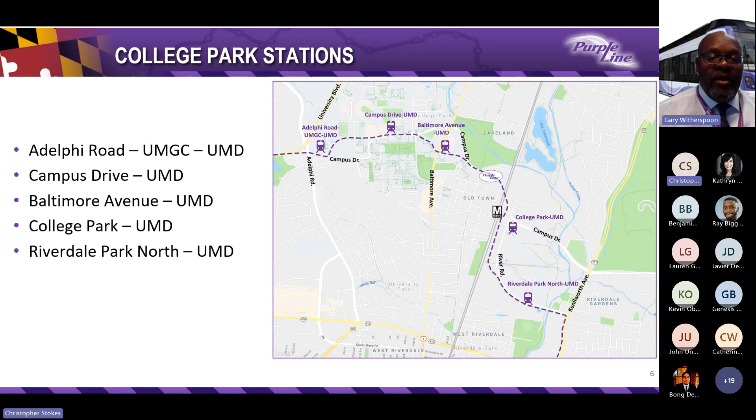We're excited to share that we've created new renderings we're sharing for the first time during this meeting. We've completed a series of renderings that will give the public a true depiction of how the station areas will look. The project will enhance pedestrian safety around each station with ADA-compliant crosswalks and upgraded signals to include pedestrian countdowns to safely cross the roadway.

The first rendering features the Baltimore Avenue UMD station at Rossborough Lane and Route 1. This station features side platforms, meaning there is a separate platform for eastbound and westbound trains, with the trains on the outside lanes and vehicular traffic in the center lanes.

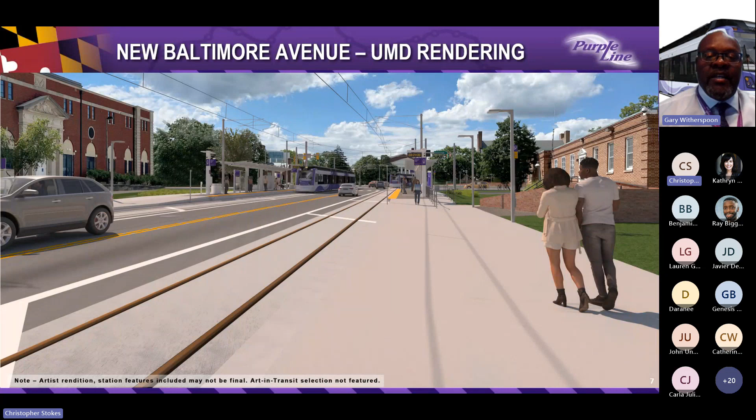This next rendering is of the Riverdale Park North UMD station. It illustrates what this station will look like. It's adjacent to River Road near Haig Drive. If you've recently been to this area, you'll know the station canopies pictured have been installed on the station platforms.

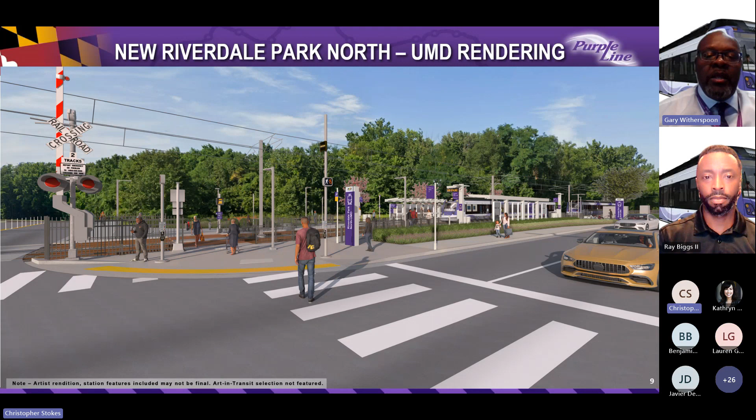Thank you so much, Gary. And good evening, everyone. We are excited to share with you an update of all the progress we have made over the last 6 months. Gary just showed some renderings of one of the stations that you will see in this progress update video that we will share with you right now.

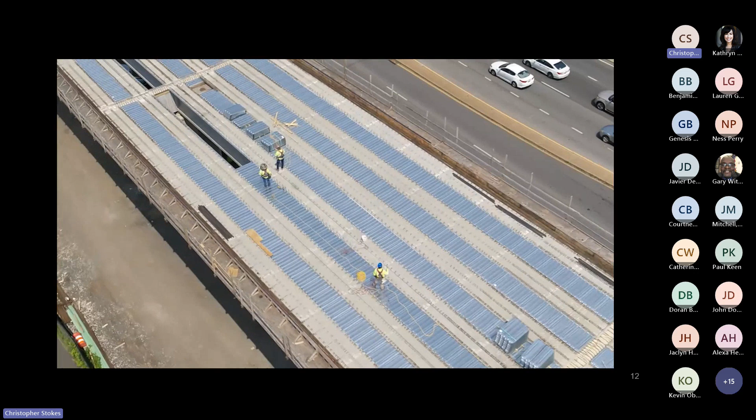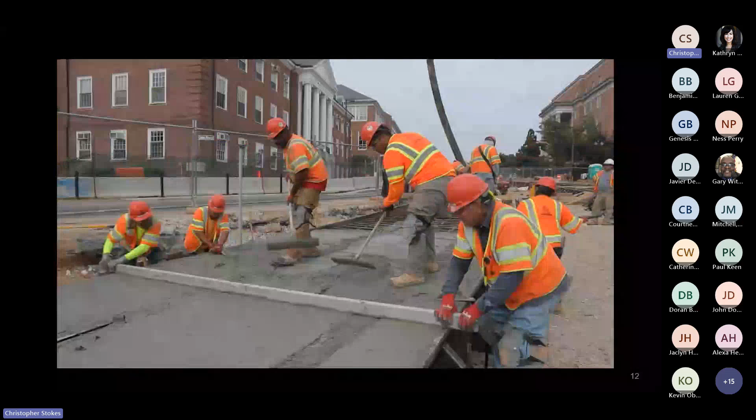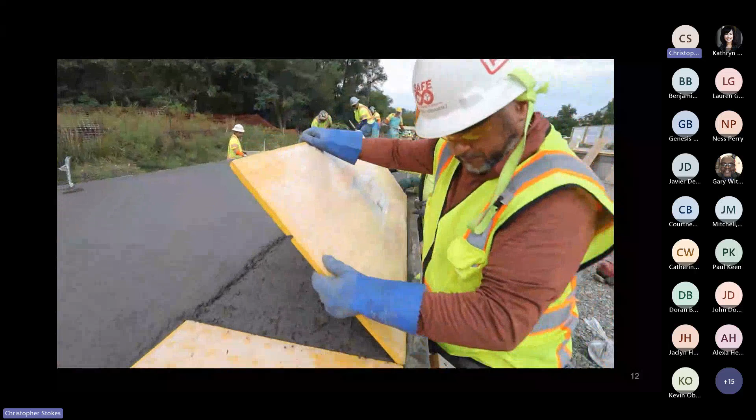I am sitting here at one of the many businesses that will benefit from the Purple Line, directly across the street from the new Riverdale Park North UMD station. This will be the first complete station. As we near the end of 2023, the nearly 1,000 workers building the Purple Line is making measurable progress along the alignment.

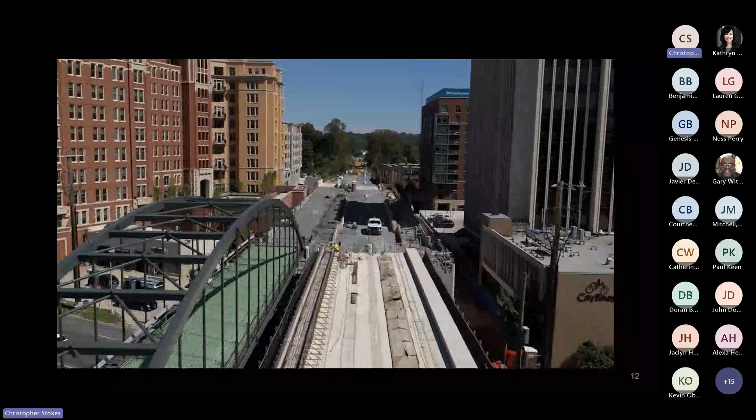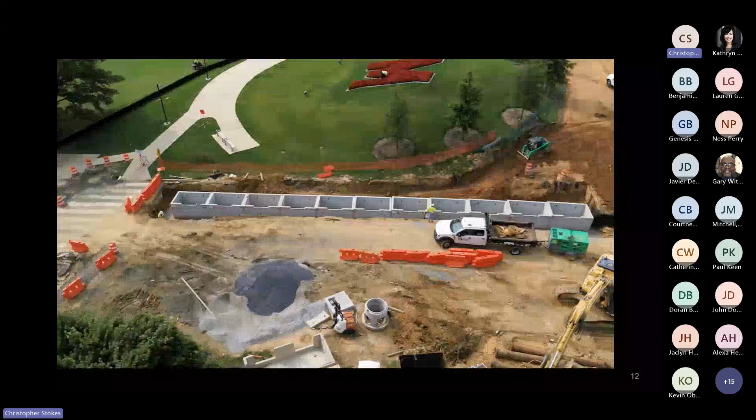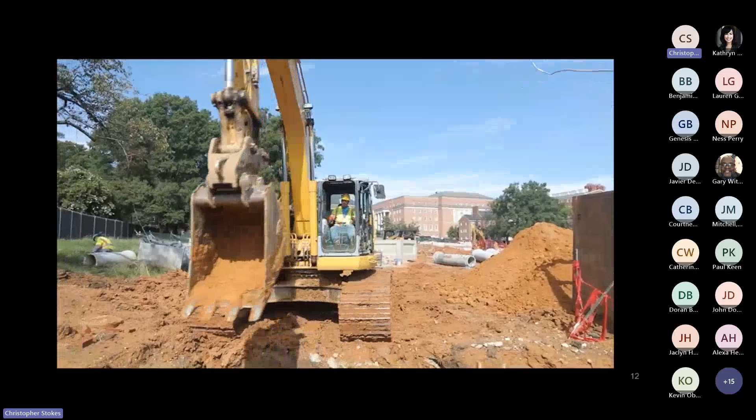Another significant improvement is the new stormwater management system. This includes miles of new pipes ranging from 12 inches to over 72 inches in diameter. More than 53% of this new pipework is now complete. Along with concrete pipes, our teams have installed over 20,000 square feet of underground sand filters, retention ponds, and planter boxes, all important parts of the new stormwater drainage system. These critical environmental upgrades may not be visible above ground, but must be completed before tracks are added.

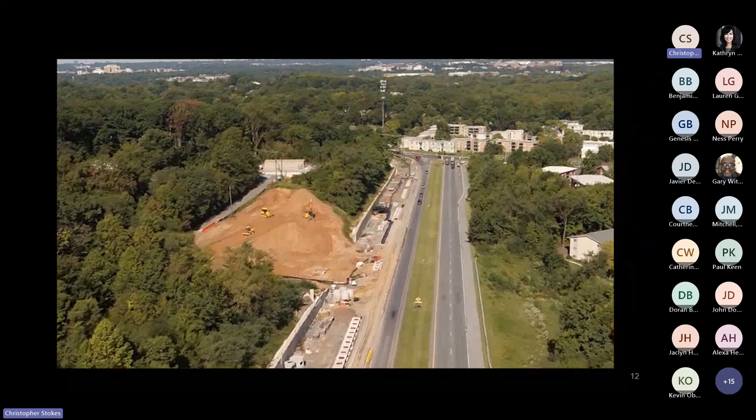In Bethesda, work connecting the elevator to Metro's Red Line has reached the bottom of the shaft, and teams have started excavating horizontally to create the cavern.

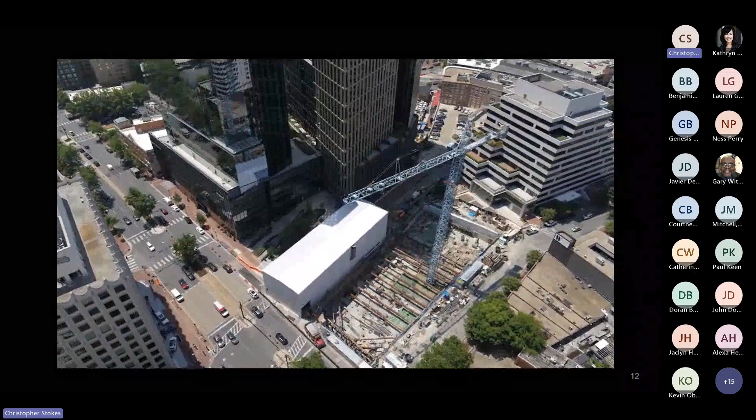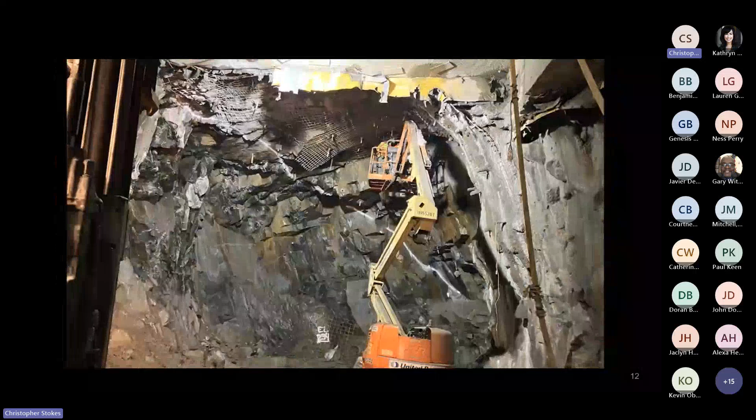The Elm Street pedestrian path across the alignment, as well as another half a dozen bridges and underpasses, will serve the new and improved Capital Crescent Trail.

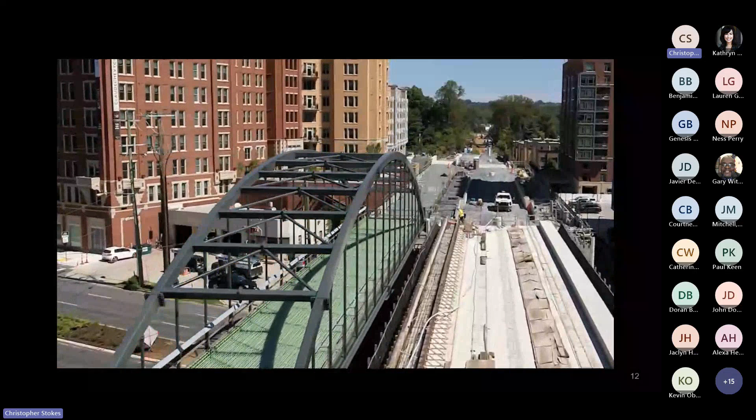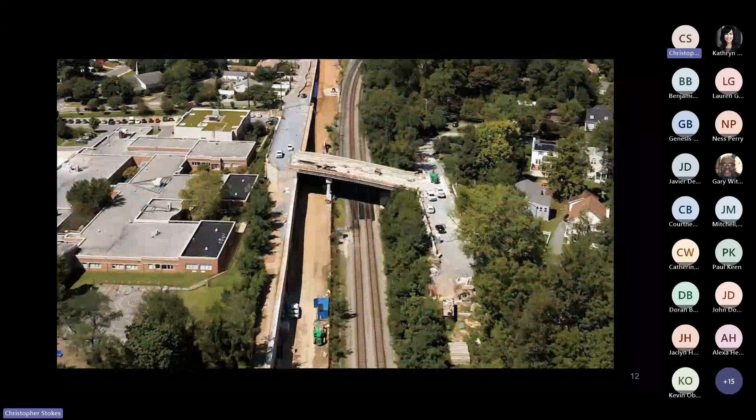Concrete placement of the historic Talbot Avenue Bridge occurred in early 2023, along with necessary road improvements, making it possible to open the road this year.

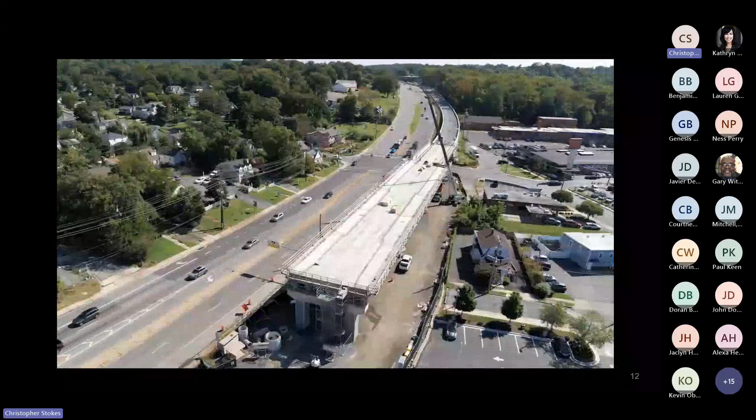Concrete for the elevated Silver Spring Station and the elevated Kenilworth Riverdale Station are complete, and crews are hard at work on the utilities and other advanced station elements.

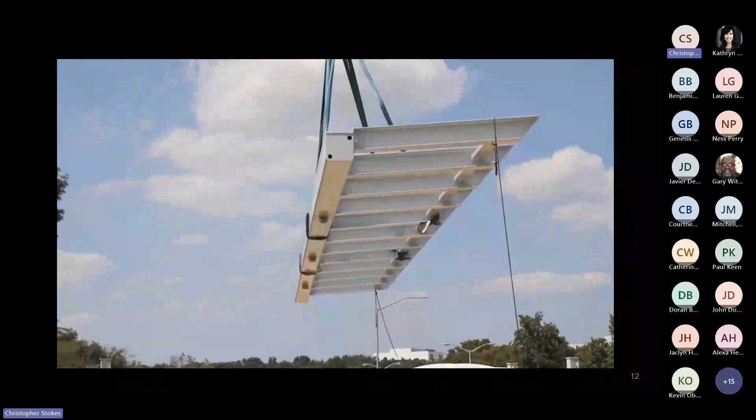And speaking of stations, more than half of Purple Line stations are currently under construction, with structural canopies installed at Riverdale Park North UMD and Glenridge. Canopies provide an exciting glimpse of how Purple Line stations will look.

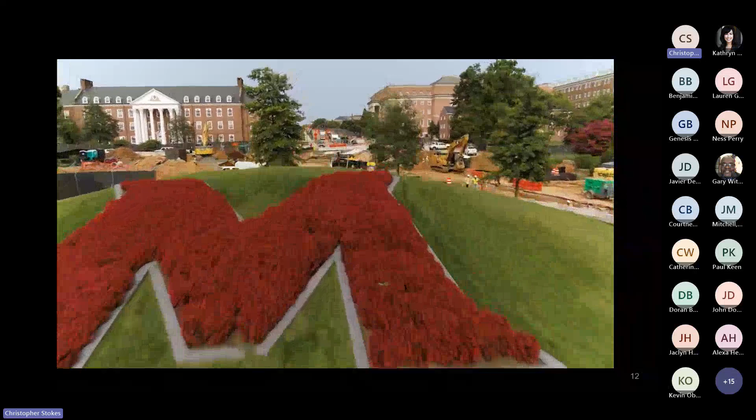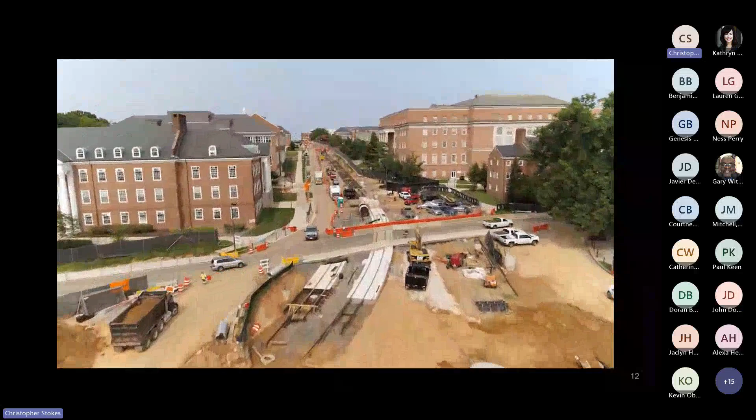During the summer break at the University of Maryland, crews accomplished a tremendous amount of work, completing drainage, roads, and tracks. Over 1,500 linear feet of track is now in place on campus as part of the 5 future stations servicing the University of Maryland.

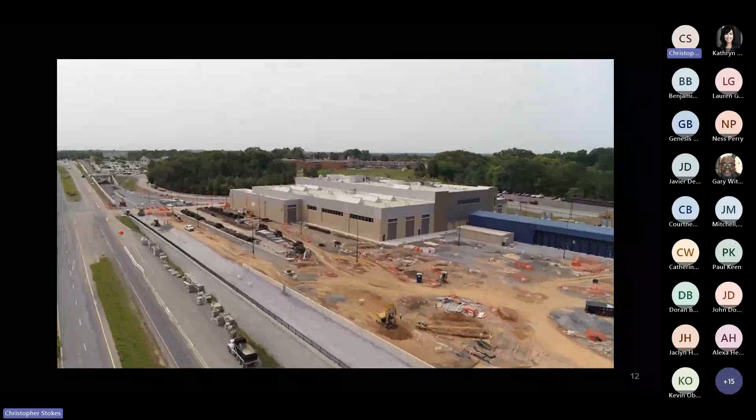Along Veterans Parkway, our Glenridge Operation and Maintenance Facility is fully operational, with yard utilities and specialty track installation underway. Purple Line light rail vehicles are scheduled for delivery here in early 2024.

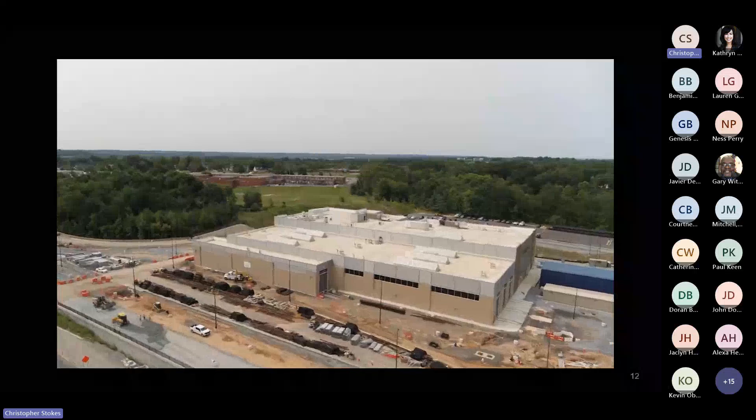All right, we have been busy over the last 6 months since we last spoke with you. And the project, as mentioned in the video, we are more than 58% complete.

A lot of that is due to working in collaboration with the University of Maryland over the summer to get that shut down. As you saw in the video, we are going right down the center of campus, down Campus Drive, and we have accomplished a lot there.

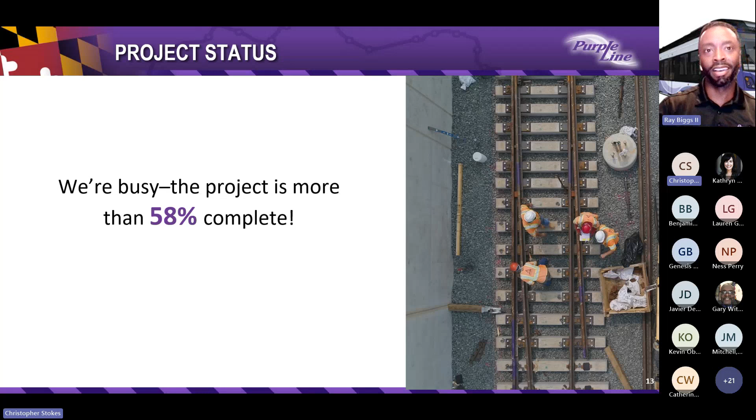We have over 60 active construction sites with over 1,100 workers. That contributes to us completing 98% of the utility relocations across the alignment, as we also highlighted in the video.

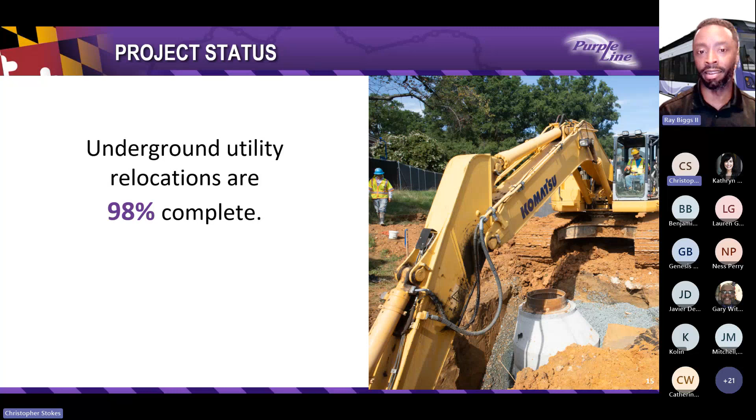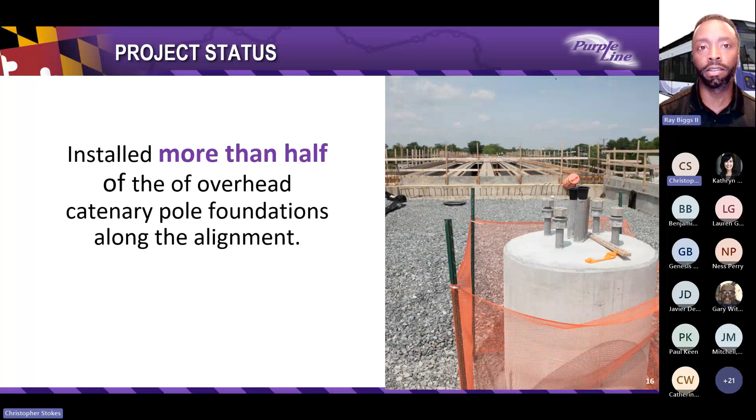In addition, we have installed more than half of the overhead catenary pole foundations along the alignment, and that is the foundation of helping to provide the power that will ultimately serve the Purple Line.

And from that power, we've installed 3 of the traction power substations, which provides the electricity over to the catenary lines to help power the Purple Line.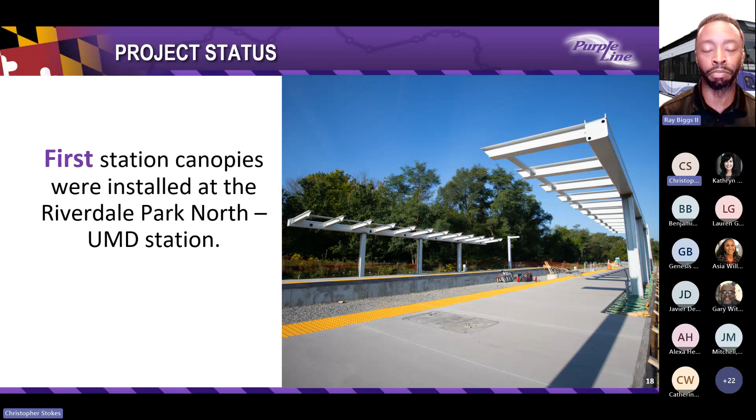And on the next slide, we talk about how many light rails we have completed. We have 26 of those, which are up in Elmira, ready for delivery, and we will start receiving delivery of those in early next year.

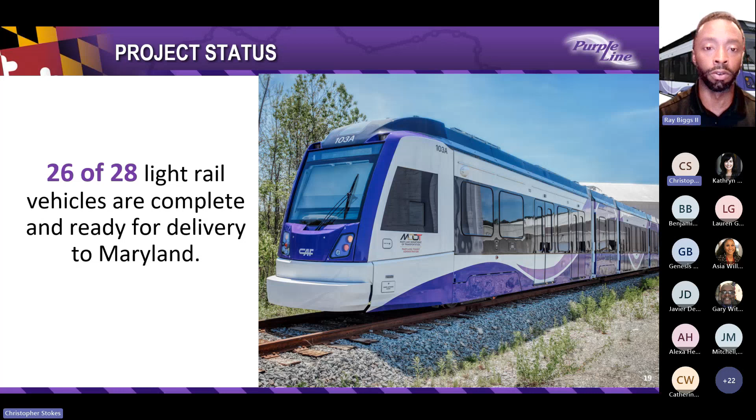And as mentioned, all of the stations are beginning construction, with 11 of them beginning construction of the 21 stations. And tonight we'll talk about all of the UMD stations and highlight what is happening across the alignment.

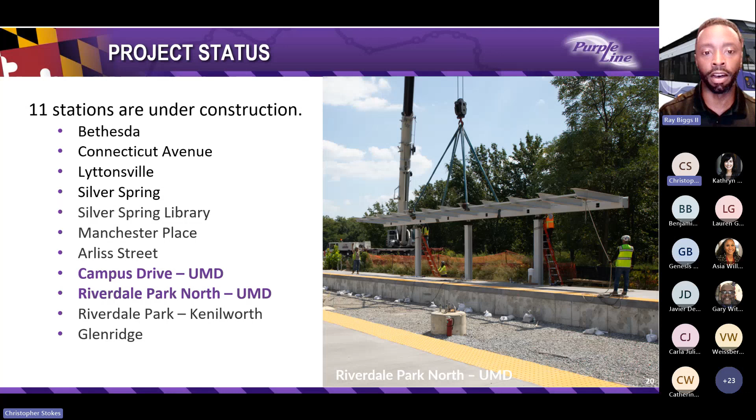With that, I will turn it over to Doran Basso, who will talk about the project timeline and give us an update of where we are with the schedule.

Thanks, Ray. So with all that progress now behind us, on the next slide, we'll look forward to where we're going. This summer, the project went before the Maryland Board of Public Works and gained approval to extend the contractual timeline for passenger service to spring 2027, as you can see there in the chart.

And this change reflects the ongoing utility relocation activities, completing construction in a dense urban environment, and some of the unique challenges that the Purple Line project has faced. So let's walk through the project timeline.

You'll see that in early 2024, light rail vehicles that Ray just showed us will arrive at our Glenridge Operation and Maintenance Facility in Prince George's County.

In the summer of 2025, we're scheduled to complete the test track, followed by system-wide testing to begin later that winter. And our teams are all working hard towards the start of passenger service, scheduled in spring 2027, as I mentioned. So for more details on what's right in front of us in this area, let's talk to Javier.

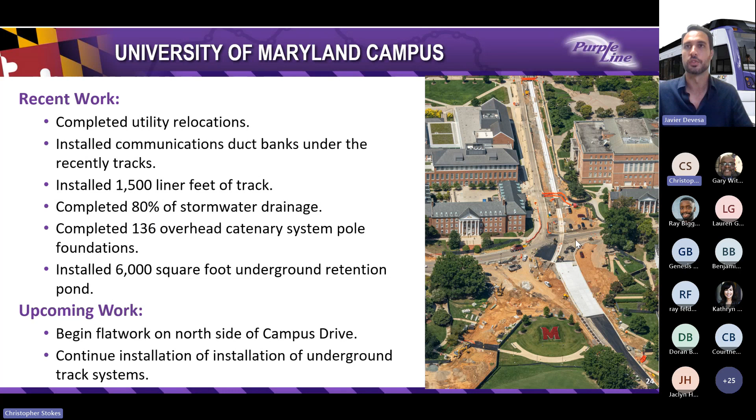What is the upcoming work for the University of Maryland? There's going to be flat work, trying to finish everything for phase 1 so we can fully transition to phase 2. We're going to continue moving west from Union Lane to complete everything for the tracks and the planter boxes and the next activities.

Let's go from west to east. The first section is the Presidential Drive and Campus Drive intersection. There we've been working with drainage mostly, which you can see in the corner next to the fence of the picture. All the storm drain was completed in Presidential Drive, as well as the OCS.

This area is one of the widest in terms of space, which allowed us to pull out all the resources for the OCS, basically a huge crane taking up all the space. So we could have pretty good production in that area, which allowed us to complete all the OCS in phase 1.

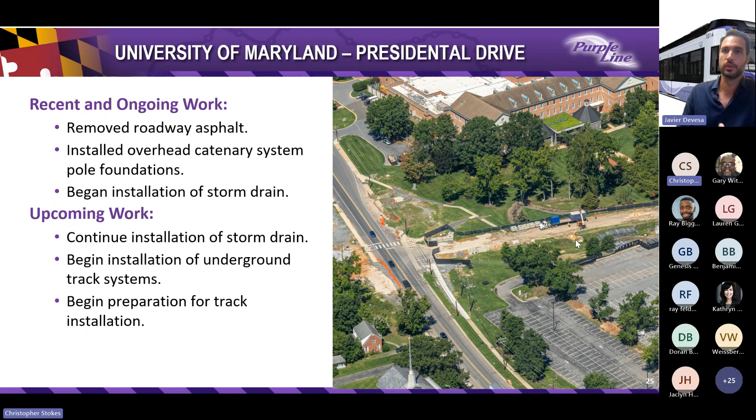The upcoming work within the next months includes installing the planter boxes, which are drainage systems all along Presidential Drive. Next, we're going to be installing the conduits and getting everything ready for the track works.

Moving next to the Cole area, that's what you can see in this picture. The main event of summer was the start and completion of the north platform of the future Campus Drive station. What you can see here is the north platform with, at this time, the backfill and the walls being built in this area. We completed the north platform last week.

Actually everything has been completed except for the canopy. The canopy is going to be built at the same time as the south platform, which will start in phase 2 after we complete phase 1. But everything was completed on this north platform of the Campus Drive station.

Next to this station, we had Union Lane, an intersection that was also completed this summer, both track 1 and track 2. There was very good collaboration again by UMD, which allowed us to close this intersection, detouring vehicles a little to the south. That made it possible to complete this whole intersection, otherwise it would have had to be done in 2 different phases. That was very good, big progress from this summer.

Upcoming work is pretty much the same, trying to get to the west, completing all the track works. We've already completed the planter boxes in this area in front of the Cole building. You cannot see that in the picture, but it's right in front of the building. We'll be moving forward in the upcoming weeks and starting track works actually in November.

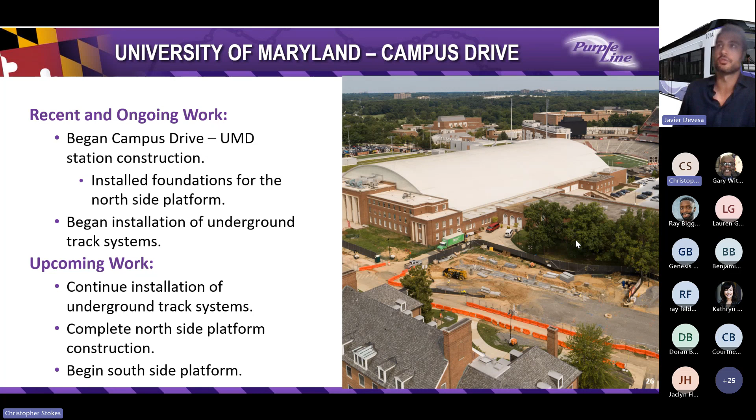So these underground retention ponds that I was mentioning before, as you can see in the picture, are basically two massive storm drain systems that collect all the water coming upstream in Campus Drive. Campus Drive has like a channel that flows all the water directly into the low point, which is the M circle that requires these massive structures to collect all the water, especially in some possible big rain events that put a lot of water into this area.

So there are two big structures, one in the north and another one in the south of the M circle. They're both connected, by what we call a flow splitter actually drains the water all again going south.

So the comparison of what an underground retention pond is, I always compare it to a tennis court, which is more or less 3,000 square feet. Imagine two of them next to each other in this new M circle. That means excavating everything at once, installing all the filter fabric, installing all the different cells, which is what you can see in the picture on the right side. They are very big and very heavy, so that required a lot of coordination between all the subcontractors and the University of Maryland.

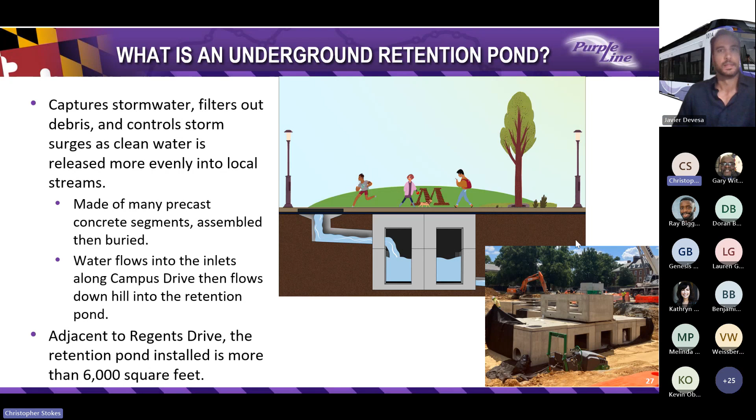Moving east, the area of Rossborough Lane. We currently have this area closed from Diamondback all the way up to the Campus Drive and Rossborough intersection. OCS was completed, and a storm drain has recently been completed into this area. So we are currently working with the multi-duct and the parallel feeder, which are the conduits that go underground, and our intention is that by the end of this year we will start the track works, both track 1 and 2, that will allow all the track flow to go east.

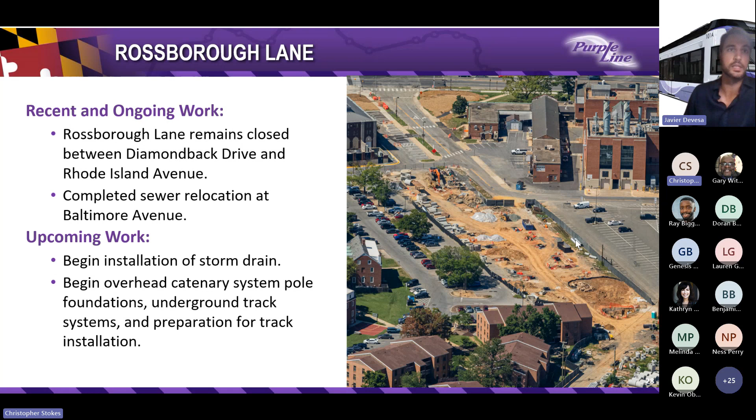Moving east as well, the water relocation was completed in this section close to the Paint Branch trail. That was a very big achievement because it activated the continuity of the storm drain that needed to be done in this area. There are still a couple of spots where we need to finish the storm drain, but it can pretty much be considered completed.

We also started the overhead catenary system foundations, which run from Campus Drive, Rossborough, all the way up to the underpass. That activity was completed as well. And after we complete the track works I was explaining before, from Diamondback to Campus Drive, we will continue moving east into this area until we arrive at the underpass.

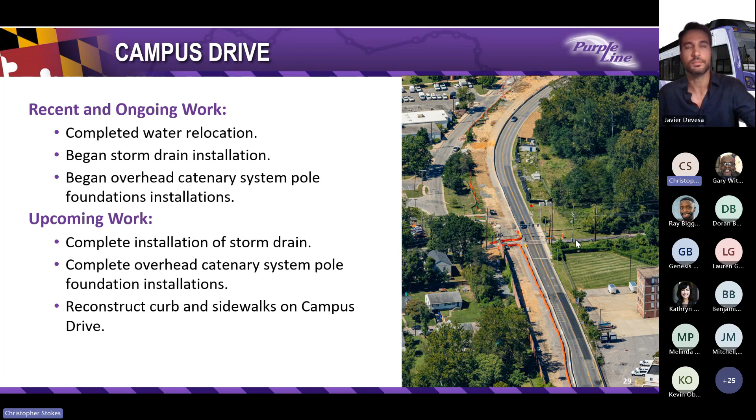College Park is an area that we are putting a lot of attention to since we need coordination as well with University of Maryland and WMATA. So all the activities need to be very well coordinated so it doesn't affect all the pedestrians coming from the WMATA station and the ones using the bus loop.

So what you can see in the picture is the area that is going to contain the future College Park station. You can see a pretty considerable excavation right on the east side of the picture - that is the location of the future College Park station. We have already completed the excavation, and we already have the subcontractor working on the station itself, so works are going to be ongoing for the next weeks.

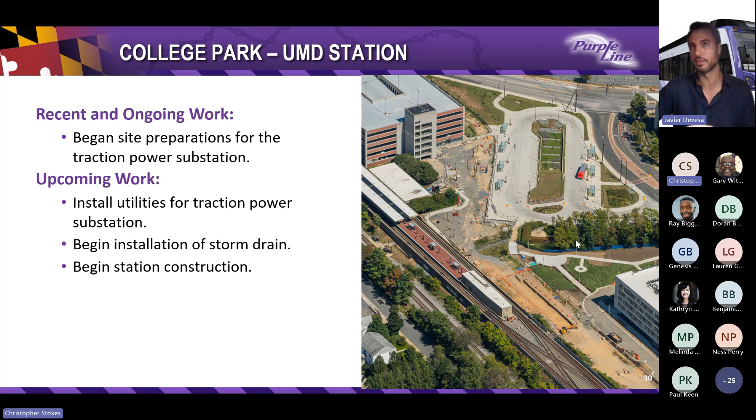At the same time, we are coordinating a small pedestrian detour in this area that will allow all pedestrians coming from the WMATA station going to the College Park bus loop, and this will allow us to have all the area available for us in order to build both track 1 and track 2. Before that, we also need to build two MSE walls in this area, and there's going to be ongoing work for the next weeks and the next month, so there's going to be a lot of activity in this location as well.

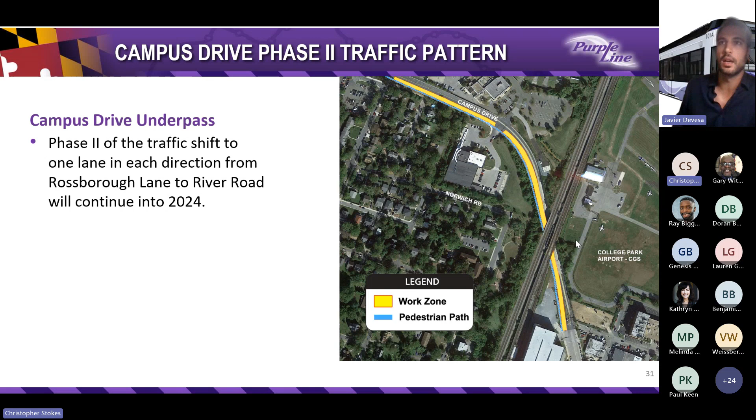Underpass: we already completed track 1 of this location, as well as some concrete paving that unified track 1 and track 2. But this area is going to be still closed for future works, and there's still going to be only one lane in each direction coming into 2024.

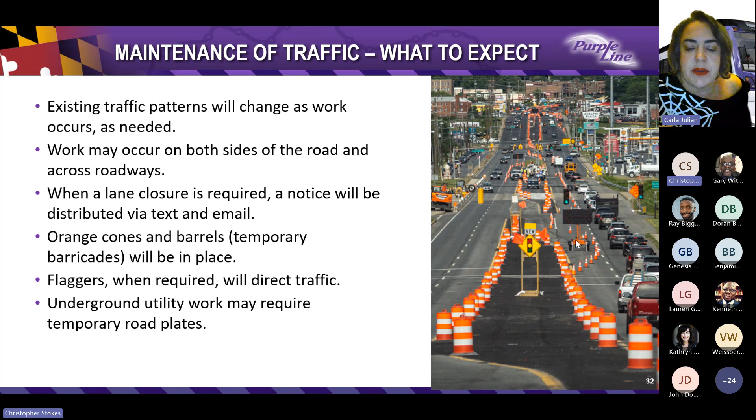So I'd just like to remind everybody, with all of the activity that we have going on, that we have a lot of MOT, our maintenance of traffic. As you traverse UMD, with all of our students, cyclists, pedestrians, and members of the traveling public, we have a lot going on out there. So we want you to be safe first. Please pay attention to the signage, stay off your cell phones when you're driving, and pay attention to the plates we have in the road. We're trying to progress this work as quickly as we can so we can turn it back over and give you this light rail project. So please, we want you to be safe.

Now we're going to talk a little bit about community engagement, which is really important.

In partnership with UMD, as a collective Purple Line project, we've been able to put focus on what's going to be cool when we finish building this, which is students and faculty ride free on the 5 UMD stops. We've highlighted those here, done some graphics, and put signage around UMD so people can see that as we disturb day-to-day life, which is unfortunately part of construction. We're trying to help people see the future of what's coming, and we appreciate everybody's partnership to be patient as we work through that construction.